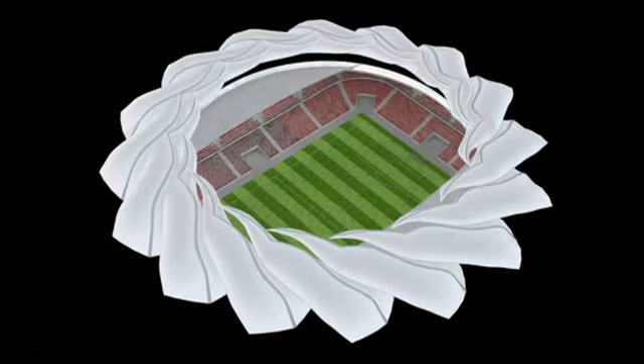This extraordinary braid of destruction and rebirth of the city and its oldest sports club inspired the design of the new sports and entertainment complex for KS Polonia. The site is located in the heart of Warsaw on the bluffs and slopes of the Vistula River, where the city was first founded in the early 1300s. The model shows the site with its urban adjacencies in proximity to the riverfront.

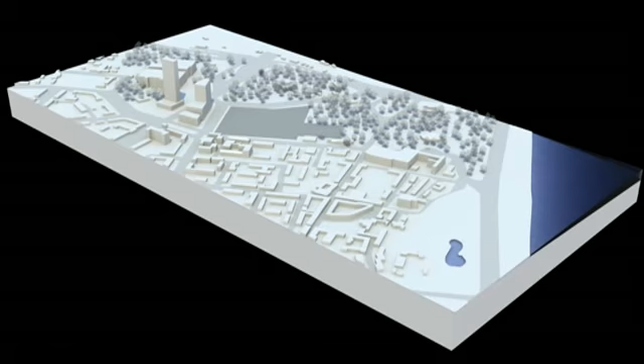This rather constrained 5-hectare site has to accept 4 major elements of the program for the proposed new facility. The 30,000-seat elite-class stadium convertible into a fully enclosed arena, a 5,000-seat basketball arena as a separate venue, a hotel spa facility, and a retail component serving both the guests within as well as the general public.

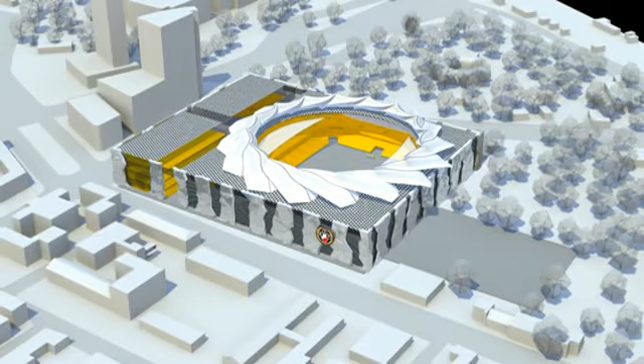The location on the slopes of the west bank of the river is saturated with history and closely intertwined with modern-day urban substance. The medieval retaining walls punctuate the sloping terrain and mark the highlights of history. The one common thread in the passage of time is the continuity of life as nature grows into the built environment and blossoms towards light and open air.

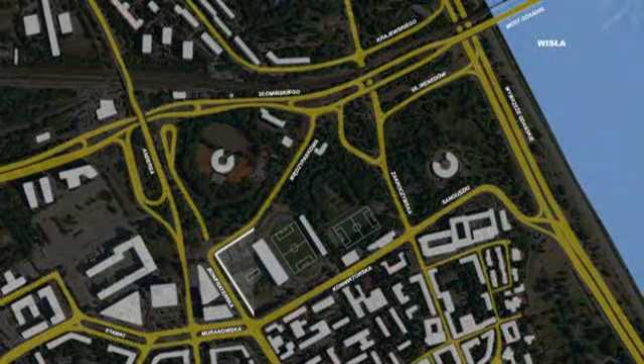The site is flanked by modern-day Warsaw to the west, the Citadel and Park to the north and east, sloping towards the river, and the Old Town to the south. Public transportation in the immediate proximity to the site includes railroad lines, bus and streetcar lines, metro line, and city streets.

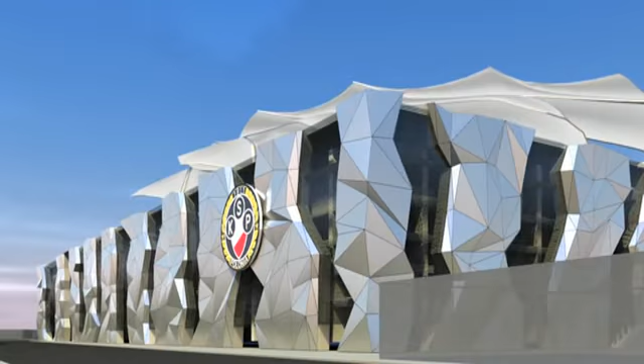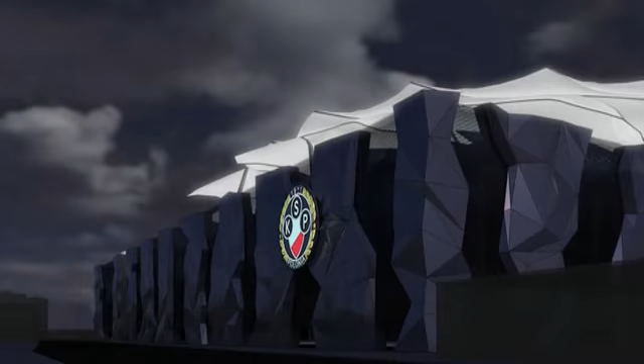The south elevation is the actual street front of the complex. Its exposure to natural light provides the most spectacular lighting effects throughout the day. Twilight inverts the lighting scene, and after dark, the light pours out from within through the openings between the solid blocks of the wall.

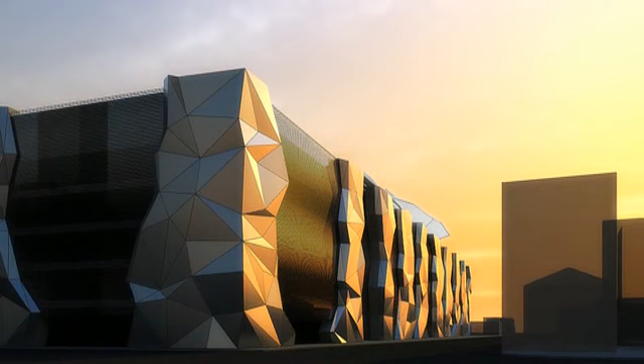The solids are clad in triangular steel panels, randomly deflected from the vertical plane in order to evoke the feel of a stone retaining wall, broken up over time by natural growth, which blossoms up on top. From afar, the flower-shaped stadium roof provides a strong landmark feature which turns into a mesmerizing light form, dominating the skyline by night.

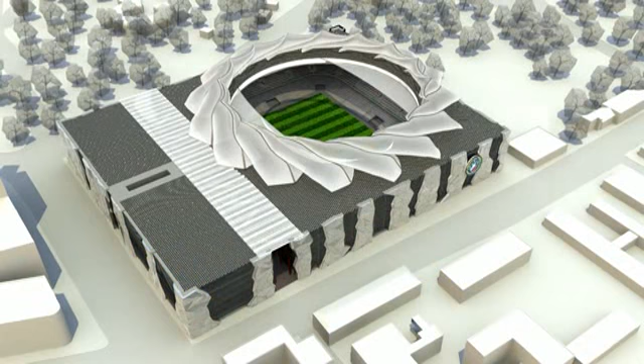A model shows the massing volume of the complex as encased in a single horizontal form, providing a smooth segue from the verticals of the modern high-rises to where the city dissipates into smaller volumes sloping down towards the river. The long section reveals the contents of the building.

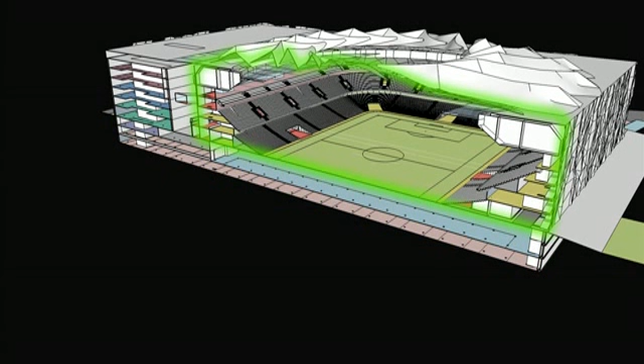3 levels of subterranean parking structure showing the blue zone reserved for buses and coaches, below grade spa, above grade the stadium, the long-side stands, office and VIP areas, 3 levels of retail and an additional 3 levels of hotel space. The transverse section shows all parking levels below the stadium, large underground access connecting opposite stands, and the length of the playing field looking across towards the main stand with VIP and mass media areas.

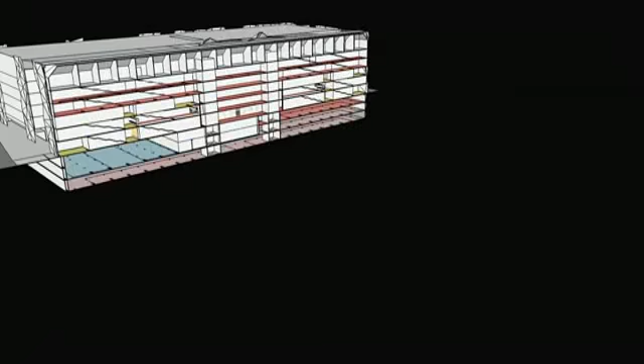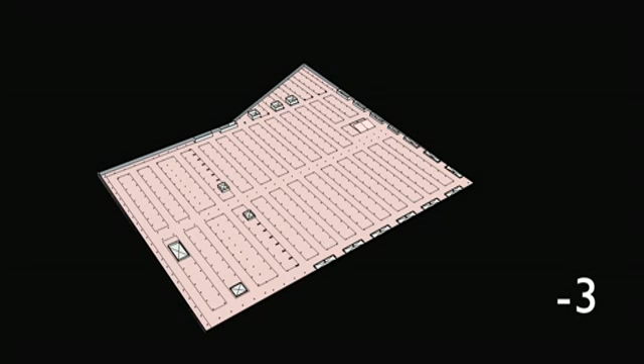Floor plans show the layout of every level in greater detail. Beginning from the lowest level of the parking structure, the facility provides approximately 40,000 square meters of parking space per level, including circulation. The bottom level is entirely dedicated to public parking.

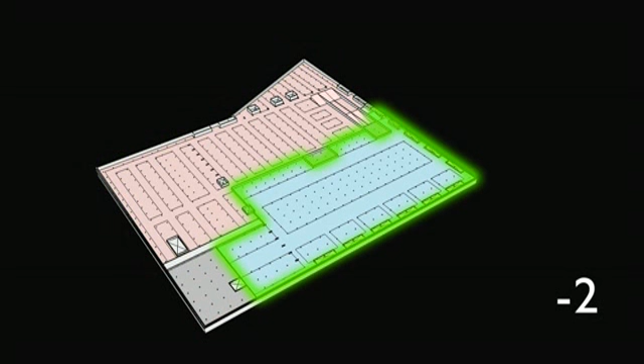The intermediate level is split between public parking and bus parking, which takes up space on 2 levels due to much higher vertical clearance. It also contains space for spa technology directly under the hotel.

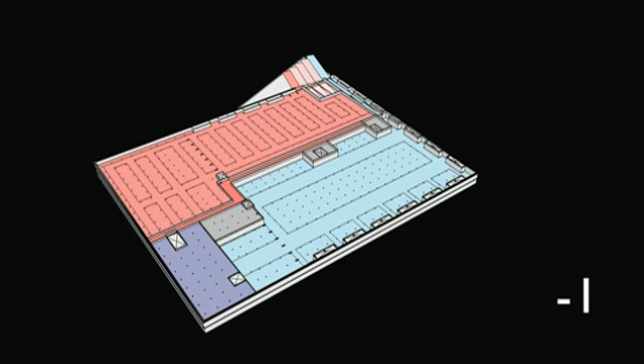The top parking level is dedicated to VIP and guest parking, with void over bus and coach areas. A portion of that space is occupied by the spa, vertically connected with the hotel above. This level also shows a 10-lane vehicular entrance and exit, where direction of traffic may be controlled depending on traffic intensity.

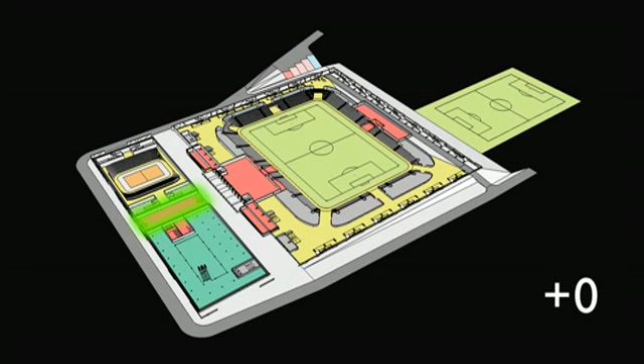Ground level bears the footprint of all major elements of the complex. The stadium, the existing club building, is expanded to accommodate new functions, the inner street for pedestrian circulation and drop-off, retail and hotel reception areas, and the atrium between the hotel and the basketball arena. The club's training field is left unaffected in its original location.

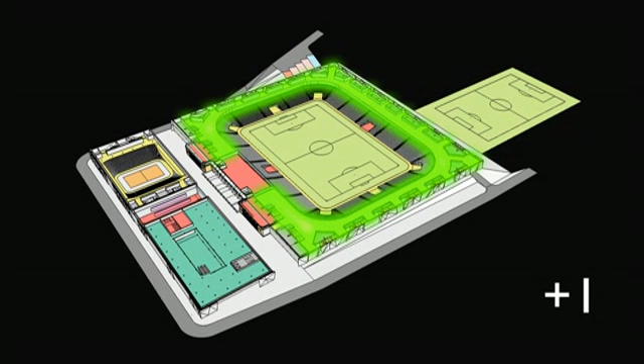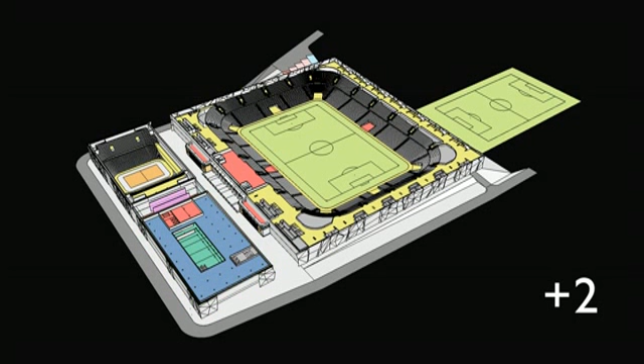The second level is the main circulation concourse around the stadium, where safe and easy ingress and egress is provided for all stands through 24 large exits all around the stadium perimeter. Hotel functions begin on the third level, revealing the definition of the street space within, the atrium, and the remaining elements of the complex as they grow towards the top.

The fourth level shows the location of VIP exclusive areas and circulation restricted to general public, and the way they connect the stadium, the hotel, and the basketball arena above the street and above the atrium. The VIP and guest areas continue on the level above, where skywalks offer picturesque sight lines throughout the entire complex.

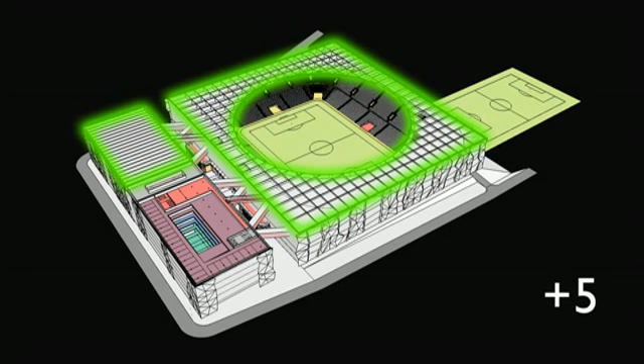The last level contains the top residential floor of the hotel, while the rest of it is taken up by technical and mechanical space on an 8 by 8 meter structural grid. The roof is crowned by the stadium enclosure and shows a large membrane skylight over the internal street.

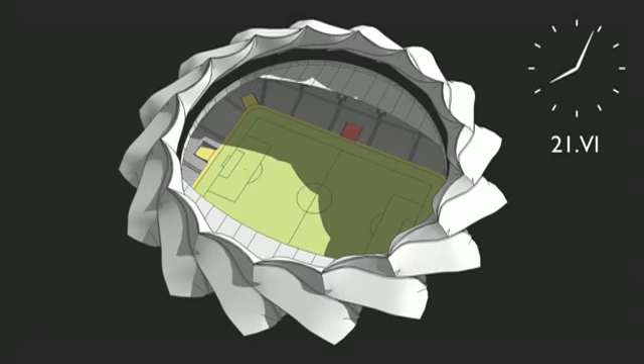The solar path simulation for the summer solstice animates the sunshade during the longest day in a year, where the playing field is entirely shaded at 5 p.m. and all the stands are shaded at 5:30 p.m.

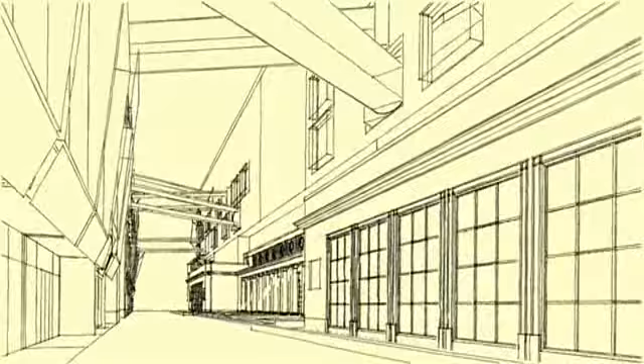A quick sketch tour of the complex allows us to appreciate the qualities of the space within. The inner street features the old clubhouse as the main artifact of the past, accentuating the original axial layout of this sports facility from 1928.

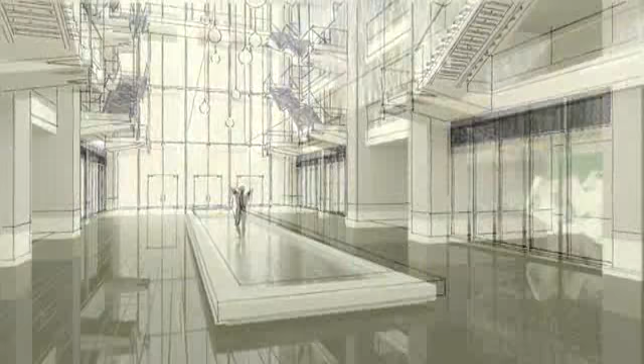Looking across the street from the colonnade, the 5-story glazed atrium comes into view with its original fountain and reflective pool on the historic axis. 2 gigantic fiber optic screens are dropped from the ceiling, with large circles cut out to accept pedestrian bridges overhead.

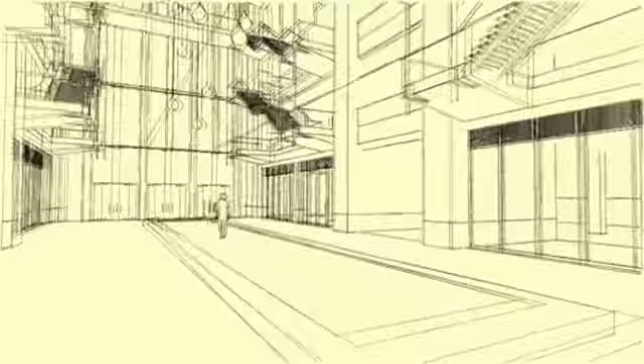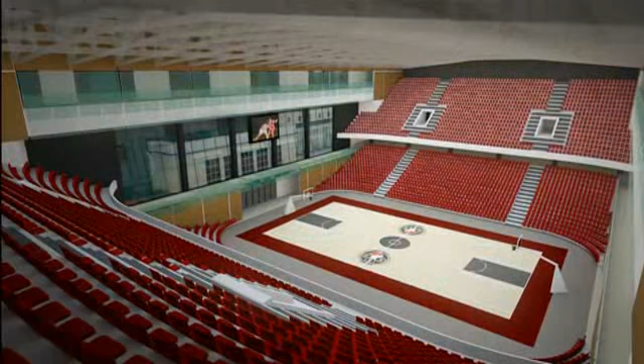The basketball arena, accessible from the atrium, is loaded on 2 long sides of the court, providing seating for 5,000 spectators and allowing daylight and sight lines beyond the hoop boards, looking towards the internal street on one end and the city street on the other.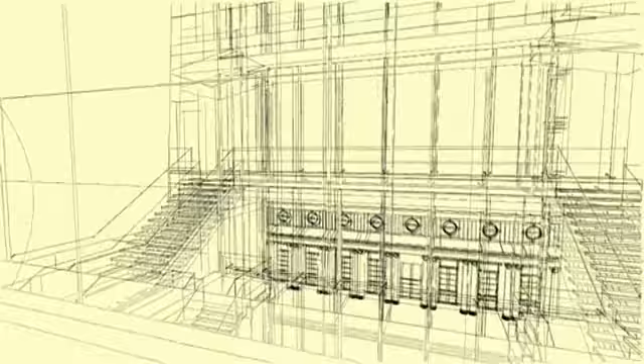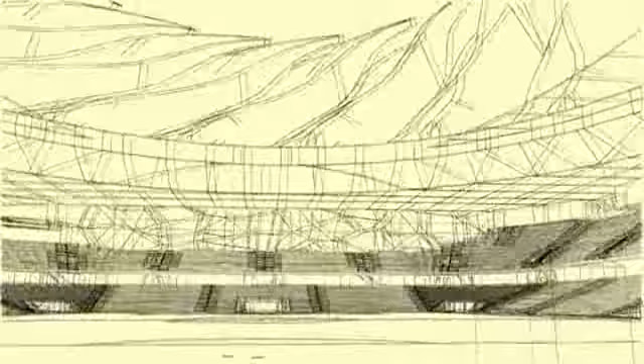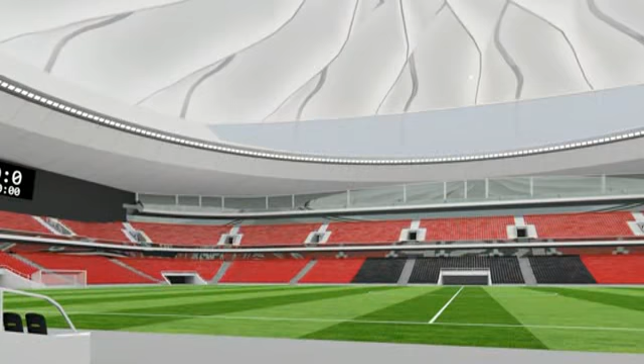The stadium yawns wide open with 30,000 seats in 2 tiers all around the perimeter of the field under a flower-like retractable canopy of leaves designed to open and close in a circular motion.

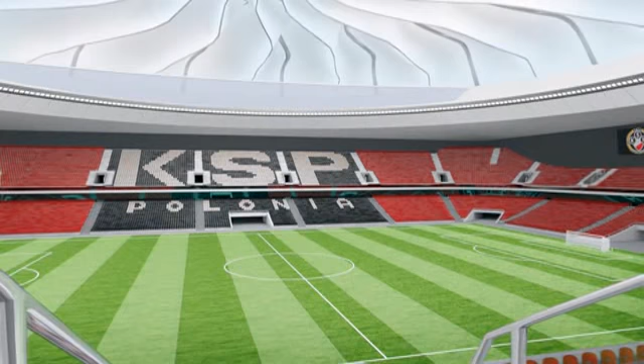The west stand is crowned with a glazed array of VIP booths on 2 of the upper levels. Games and events can be observed from there very much the same as they would be viewed by television cameras.

The stadium offers unobstructed sightlines from every seat in the stands at the lowest possible elevation for this level of occupancy. The quality of the surrounding space is aimed at emphasizing that the only natural limit in the spectacle of human achievement and performance is indeed the sky itself.